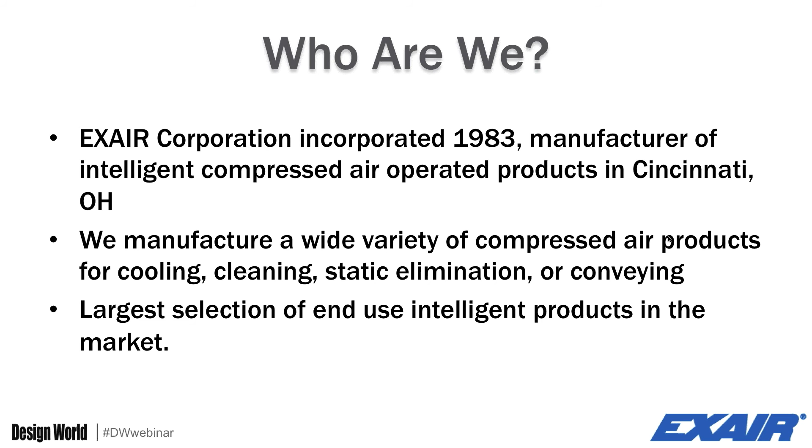I ask a little bit for you to get involved here. With the webinar format, it's hard to gauge reactions and interest. The first thing I want to do is see who's out there and test the speed of the chat. If you get a chance during the webinar, please send us your job title or responsibility that brings you here. Also, if you know the compressed air usage in your plant or the size of your air compressor, either in horsepower or SCFM, just to give us some idea of what you might be interested in and how we can help you. Let us know how the webinar works out for you. I'll give you a few seconds to get that inputted there.

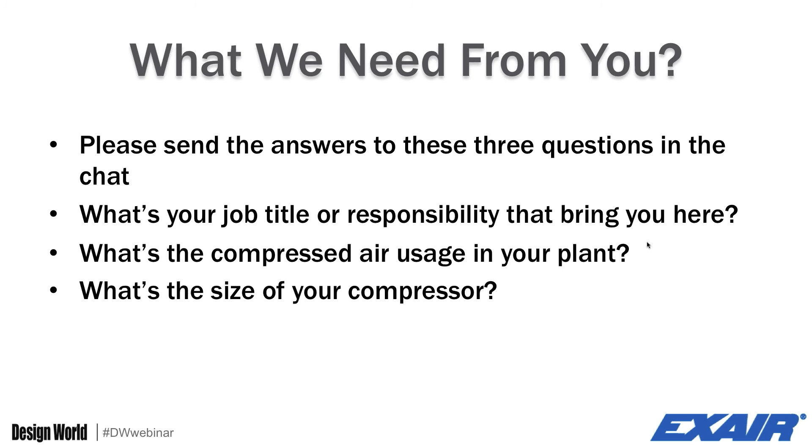Today we're going to talk about intelligent compressed air. Many compressed air systems are put in very quickly and inexpensively or cheaply. We want to take the next steps in replacing those open blow-offs and homemade nozzles or homemade blow-off devices with an engineered nozzle or an intelligent solution.

Later we'll get into the how, where, and what intelligent compressed air products are. First I want to talk about the why. It's very simply stated: money and safety. Compressed air is the most expensive utility in most plants. Inefficient blow-offs can cost thousands of dollars per year in wasted energy. Most estimates say that between 30 and 50% of all compressed air generated is wasted, and we want to help you find the largest sources of wasted compressed air. On the safety front, noise and dead-end pressure will be the two topics we cover.

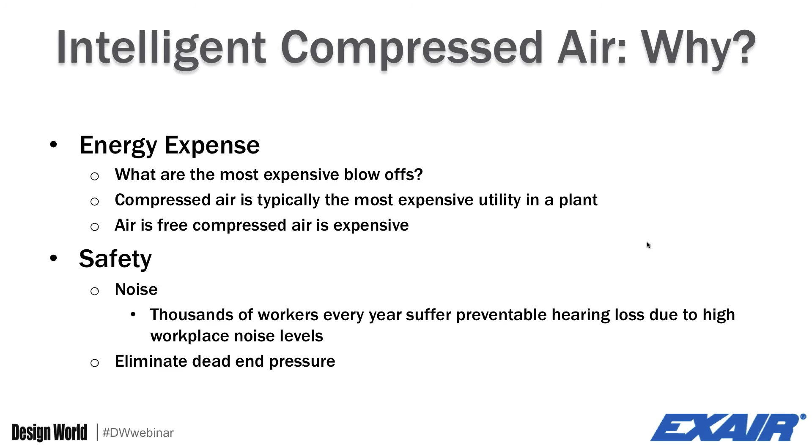This compressed air presentation is different from most. Instead of talking to you about your system's overall capacity and supply and demand, we're going to focus on the point of use. In many cases, folks preach to audit your compressed air supply to match your demand. They only want to ensure that the compressed air you use is generated as efficiently as possible. In this presentation, we focus on trimming your demand in the first place so that you aren't just improving your efficiency, but you're reducing your overall usage.

Once your usage is reduced, a compressed air audit can be even more effective to ensure that the air you need is efficiently produced. In other words, why would you want to install two high-efficiency 25 horsepower screw compressors when your plant only needs 20 horsepower worth of air? Finally, on top of the priceless value of safety, there are very real fines associated with OSHA violations from open blow-offs. I've seen fines from $6,000 to $10,000 for a compressed air violation.

So what we'll cover today is reducing demand, replacing inefficient processes, and increasing safety.

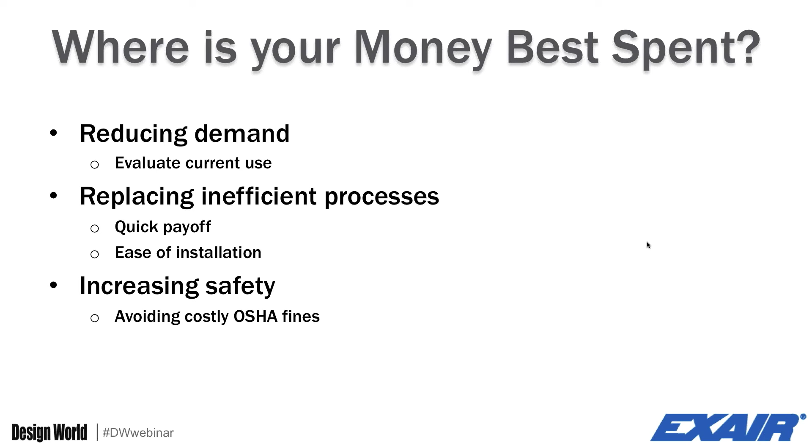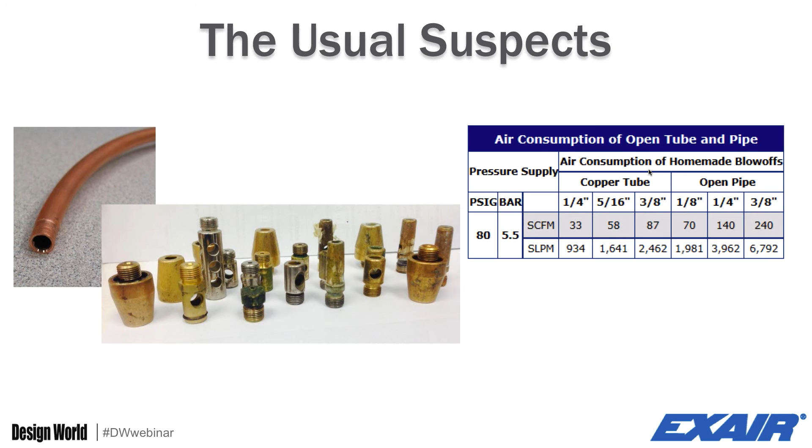An open-type tube also consumes more compressed air compared to an engineered solution, so it's wasting a lot of energy. On the right, here's a chart of the air consumption of an open tube or pipe. You'll see this quarter-inch copper tube pictured here throughout our presentation. In this chart, at 80 psi, it uses 33 SCFM of compressed air. That's quite a bit and is a significant demand.

That would be something you really want to look at for replacing with an air knife, or a long linear air nozzle, if you're not familiar, but it replaces a long span there.

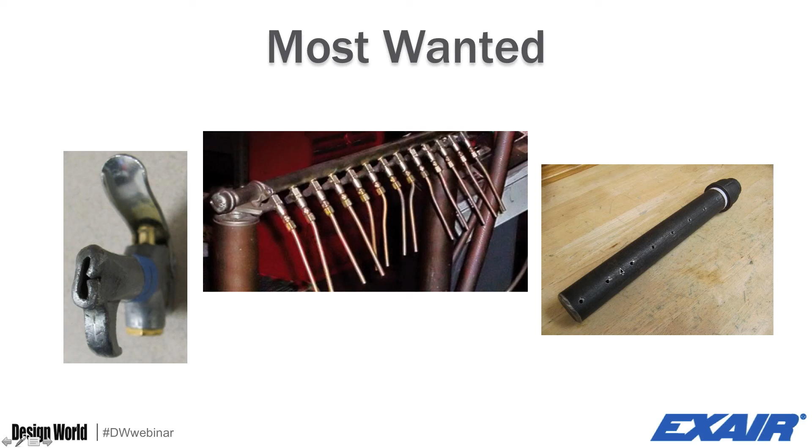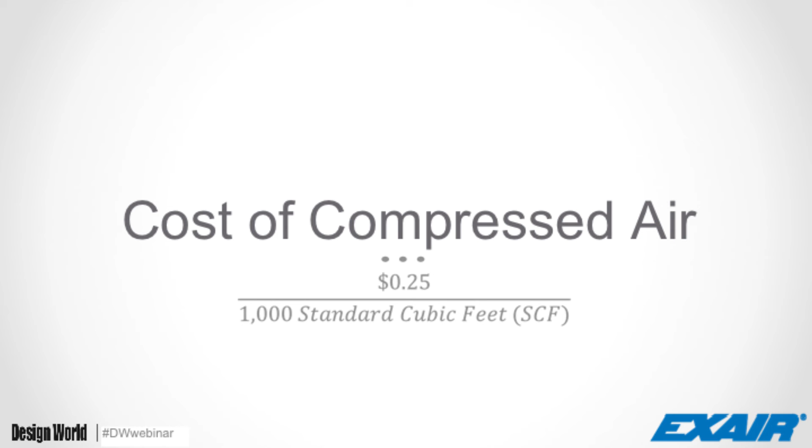I'm going to go through an example here shortly. First, a little bit of background as far as how we come up with the cost of compressed air. We use this in our literature: 25 cents per 1,000 standard cubic feet generated. This is a pretty conservative number for Europe and the coasts, but in the Midwest, it's a pretty accurate number by our account. And here's how we come up with that number.

Let's take, for instance, a 20 horsepower compressor that uses 15 kilowatt hours. Those 15 kilowatt hours at 8 cents per kilowatt hour means it takes $1.20 per hour to run that compressor.

You might have a different electrical rate that you want to replace in there, so please do that and follow along as best you can. If you have any trouble, you can always contact us with your electricity rate and the compressor itself, and we can look into that more.

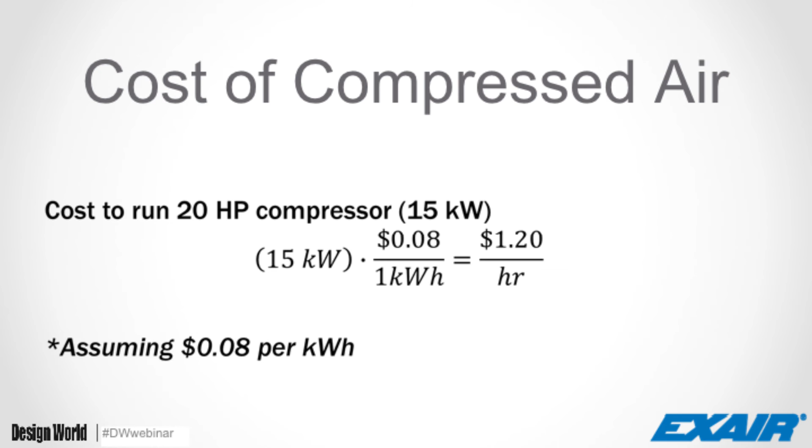So once we have the cost to run a compressor for an hour, let's look at the time it takes us to produce 1,000 standard cubic feet. A 20 horsepower compressor puts out approximately 4 SCFM per horsepower. Over 60 minutes, that'll put out 4,800 standard cubic feet per hour. To produce 1,000 standard cubic feet will take 0.2083 hours, or 12.5 minutes.

That 4 SCFM per horsepower is a conservative rule of thumb. Some air compressors can make 5 or more SCFM per horsepower, but individual compressors and delivery rates will vary. You never know how much you're leaking throughout the system, so we feel like that 4 SCFM is still a very good rule of thumb. You'll see that a lot in different compressed air presentations and forums. So we take that time it takes to produce 1,000 standard cubic feet, combine it with the cost it takes to run a compressor for an hour, and you get 25 cents per 1,000 standard cubic feet produced.

That's how we come up with that number. If you have any questions, please contact us. If you think that's a good number, then the rest of this will hold true, and you don't need to follow along quite so closely. If you come up with a different number, you can go through and use that as we're going through, or after the presentation, we can go back through it with you and figure out what your cost would be.

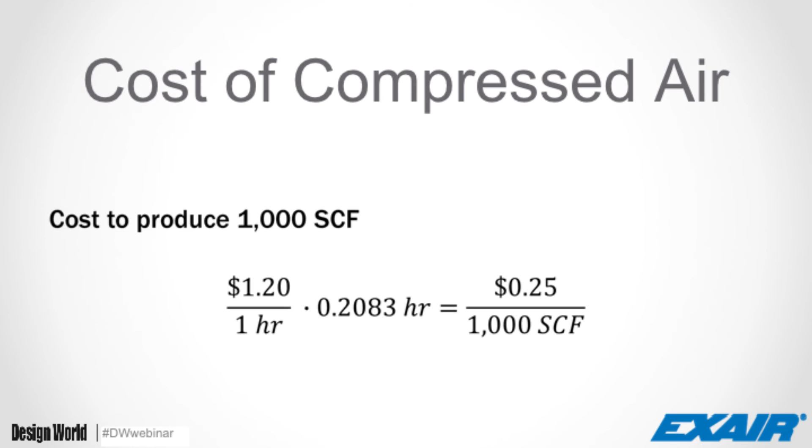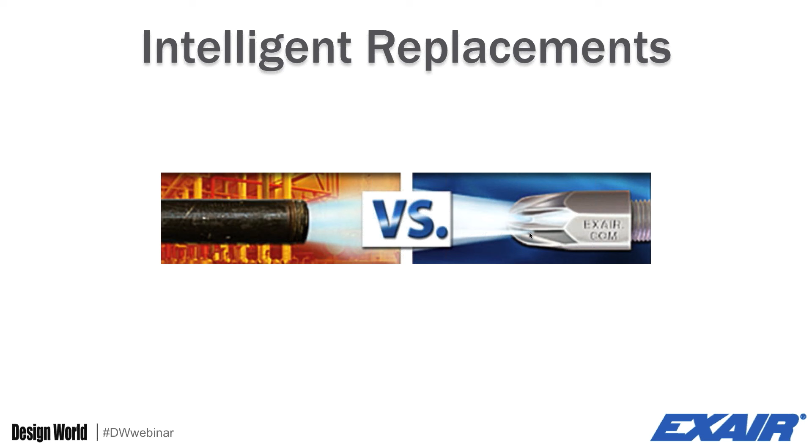Let's get to an example. How much would it really cost to run a 1/4-inch copper tube for a year, and how much energy could you save with a compressed air nozzle? There are a number of slides here of calculations. Please ask if you have any questions.

So a 1/4-inch copper tube, as we said earlier, is going to use 33 SCFM of compressed air compared to a 1100 super air nozzle, which has a 1/4-inch NPT air inlet. It uses 14 SCFM. In addition to the air consumption, you also notice the noise level is almost 30 decibels higher with an open tube as opposed to an engineered solution.

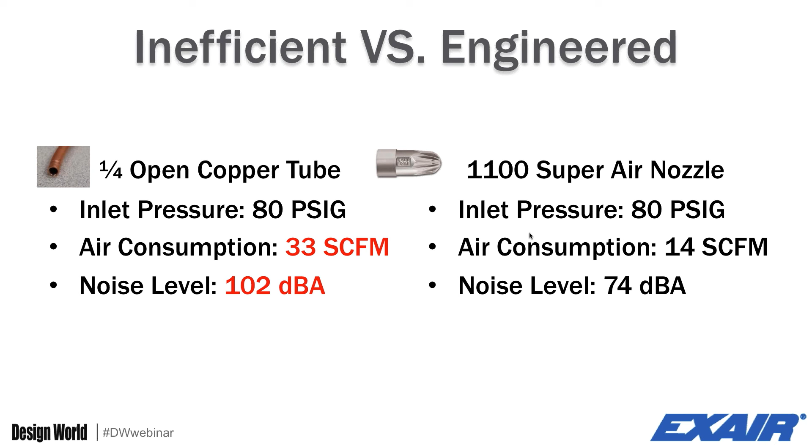A 1/4-inch open copper tube costs 50 cents per hour to run. We did that by multiplying 33 standard cubic feet times 25 cents per 1,000 standard cubic feet, which was that cost of compressed air that we received, and then multiplied it by 60. So that was able to get us that 50 cents per hour to run here. The shift would cost $3.96.

An 1100 super air nozzle would cost 21 cents per hour to run, so you saved around 28 cents per hour to run it. Per shift, an 1100 super air nozzle will cost $1.68. An 1100 super air nozzle saves $2.28 every 8-hour shift over a 1/4-inch copper tube.

But we take that number of 1/4-inch open copper tube costing $3.96 per shift over 250 shifts per year, and that will cost $990 per year. A 1100 super air nozzle costs $1.68 per shift times 250 shifts per year, which costs us $420 per year to operate. So an 1100 super air nozzle saves $570 every year over a 1/4-inch copper tube.

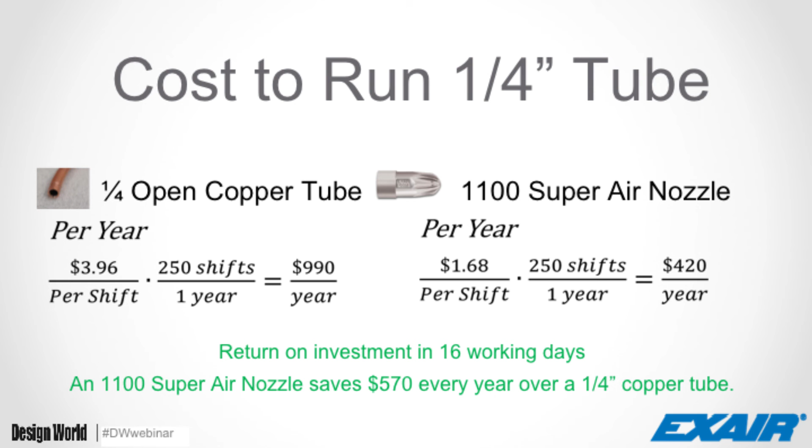So we didn't talk about any benefits from compressor maintenance, noise reduction, or OSHA compliance. All we talked about is the cost of compressed air. You can see there's a significant savings just replacing one nozzle. In a couple of minutes here, we'll talk about a case study where a customer replaced 40 of these open tubes and the savings they were able to realize. If you have any questions about how we got there, I'm sure you do. Please let me know at the end, and we'll go through that again.

Let's look at a case study. This is a customer that we had that was a high-tech plastic producer. They're operating 40 machines that use crimped quarter-inch copper tubes at 100 psi. You can see each of these copper tubes here that have been smashed.

You'll notice there's slight variations. This one's a little more rounded. That one definitely has a crease in the center. This one shows a little sign of the crease, but is overall an oval pattern. These had varying rates of how much compressed air they actually used, but overall it was still much higher, so we took an average of those to compare it to our 1100 super air nozzle.

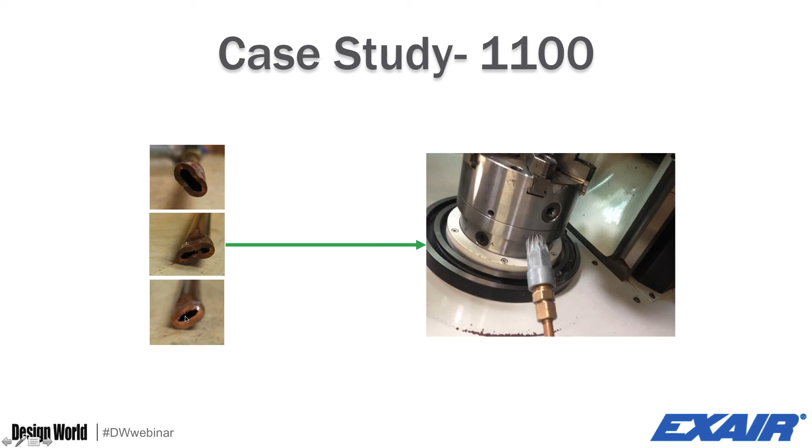We actually tested those quarter-inch crimp pipes at our facility. They consumed 40.4 SCFM at 100 psi. You'll notice that 40.4 is larger than the 33 SCFM I was using in the previous example. That's because they're running at a higher inlet pressure, so they use proportionally more compressed air. The 1100 super air nozzle at 100 psi will save or use 23.4 SCFM less than that 40.4 SCFM.

Quarter-inch copper pipe costs $1,260.48 per year to operate. An 1100 super air nozzle is going to save $730 per nozzle per year to replace. In this example, an operational year is an 8-hour day with 250 days per year or 250 shifts per year.

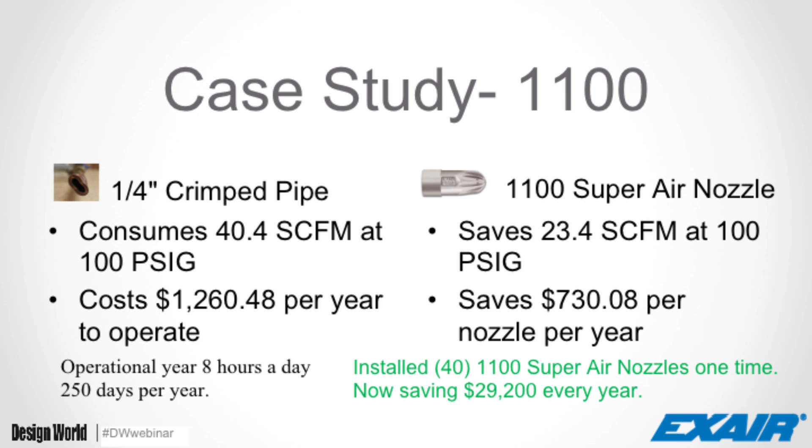The company that we were working with in this case study replaced 40 quarter-inch crimped pipes with 1100 super air nozzles, resulting in the savings of $29,200 just in compressed air usage every year, and they were able to realize that indefinitely. Really, there's no reason that will ever change. They're always going to be able to save that amount of money on their utility bills.

So you can see, it might not cost a lot to run a compressed air nozzle for a couple of minutes or an hour, but if you're running continuously, that can add up to a very big cost over the years, and replacing those can be a huge savings.

Talking about on the compressed air side, not so much just money, but how much compressed air you actually saved. An 1100 super air nozzle saves 23.2 SCFM over that quarter-inch crimped pipe.

An air compressor produces 4 SCFM per horsepower. So to replace that crimped pipe with a nozzle, you reduce your compressor load by 5.8 horsepower per nozzle. Replacing 40 nozzles could save 232 horsepower of compressor. When you talk about air audits and efficiency of the compressors and the load, being able to cut that demand can really have an impact.

Air audits still have their place and can make a tremendous difference, but you want to make sure that you're sizing that demand properly. Being able to cut that demand is a great first step.

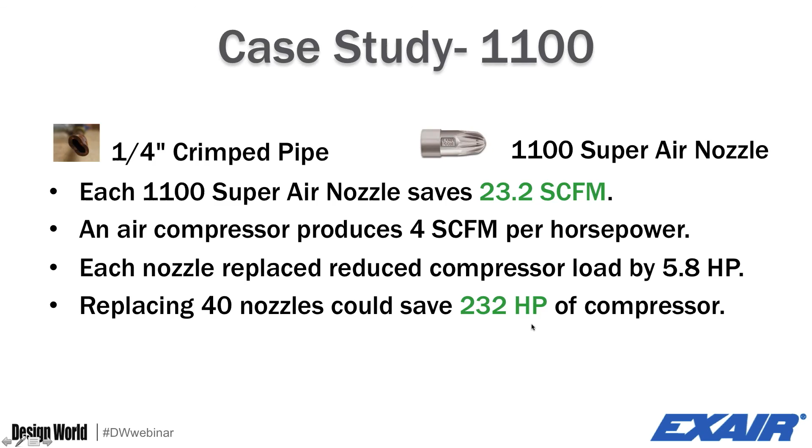So that's what I wanted to cover about the cost of compressed air. We'll go back to that as well here in a minute, but I want to talk a little bit about the safety benefits as well. Specifically, we're going to talk about OSHA Dead End pressure regulations and the noise directive.

You can either limit your pressure incoming to the nozzle to 30 psi, or you can allow some kind of regulation to control the pressure to 30 psi. For our nozzles, we prevent them from being dead-ended so that pressure cannot build up. There's always a path for the air to escape. Let me show you an example of what I mean so maybe you can get a better understanding.

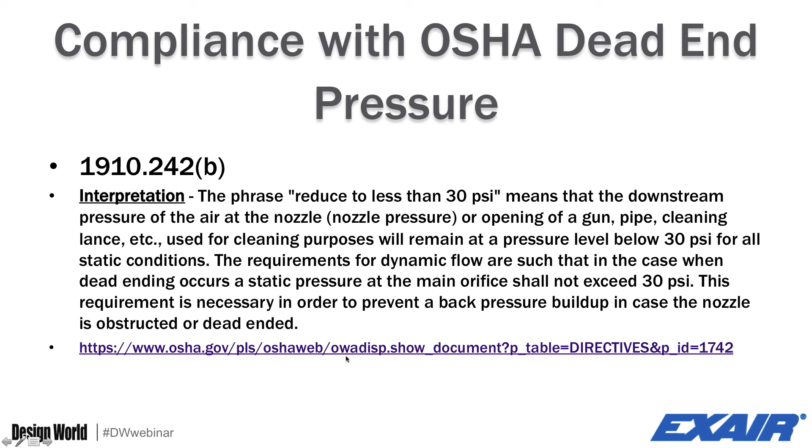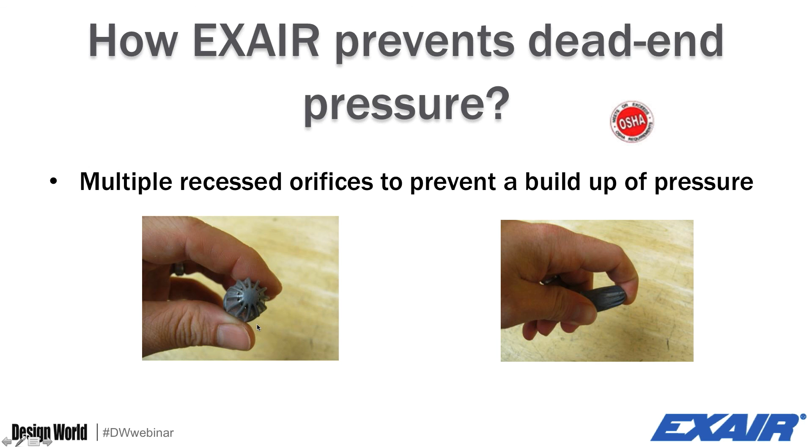Allowing you to comply with that OSHA regulation. All of EXAIR's products use some combination of these principles, either multiple orifices or a covered orifice, to bring you an OSHA-compliant compressed air device.

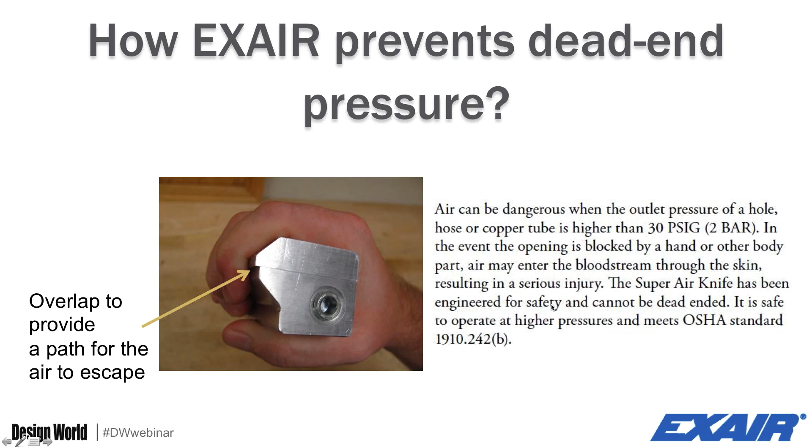Other than the OSHA dead-end pressure, there's also the noise directive. OSHA has outlined a maximum allowable noise exposure table to protect workers from constant noise. If you're exposed to more than 90 decibels of noise in an 8-hour period, you're required to wear some sort of hearing protection or take some steps to mitigate that noise to protect your workers.

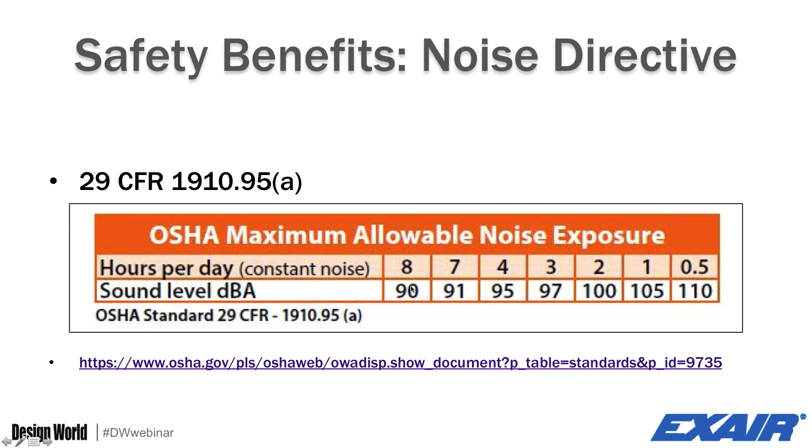By using an engineered air nozzle, you will reduce the noise with the smooth flow that the nozzle creates. The intelligent compressed air product does not feature that piercing wind shear noise, which is especially painful and distracting. You'll notice this with cross-drilled holes all the time. There's a real high-pitched noise that I associate, or used to associate, with compressed air before I worked here, and you can see a huge change in the flow, just the way we condition the air coming over the nozzle, as opposed to the sharp corners that you typically see.

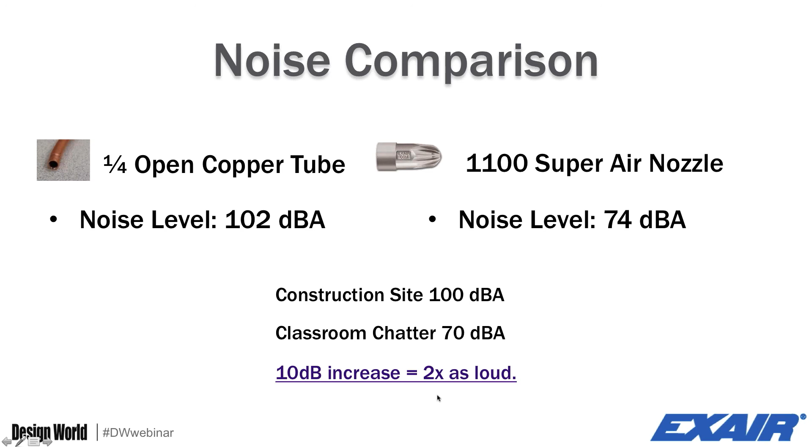Just to give you some reference, a construction site is around 100 decibels. That's up near where that copper tube may be. Classroom chatter with a room full of 5th graders is probably around 70 decibels. Something you can definitely talk over; you might have to raise your voice a little bit, but it's something you can carry on your workday through. Just to give you a point of reference, a 10 decibel increase means that you're going to perceive the noise as twice as loud. So that 30 decibel increase means that a 1/4-inch copper tube is perceived 8 times as loud as an 1100 super air nozzle.

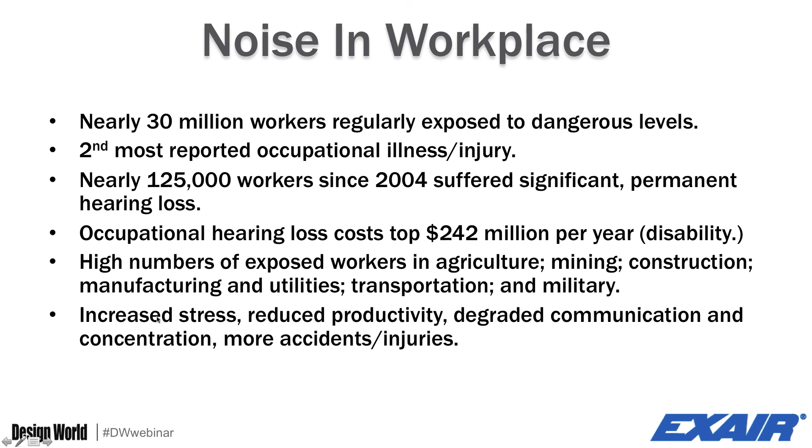Anytime you're trying to train new employees or communicate with a group of people, that noise is going to intrude. And anything you can do to cut down on that, to allow people to clearly communicate, is going to be better for the overall safety of your facility, and that can't be overstated.

So I talked a lot about an EXAIR nozzle, an intelligent compressed air product, or an engineered nozzle. What makes a product intelligent? There's a couple of things that I would want to see in an engineered nozzle. Some sort of air entrainment, a nozzle designed to pull in ambient air to get the most use out of your compressed air. In the next slide, we'll talk more about what that is and how EXAIR does that. Second, we want the nozzle to be quiet, and lastly, we want the nozzle to be safe. An engineered nozzle has taken these three components and made it intrinsic to the design so that you can get the most out of your compressed air.

Secondly, you're looking for some sort of manufacturing quality and consistency. Quarter-inch crimped copper pipe is going to be different, and it's going to vary from person to person who crimps it and makes it and how it's applied. Using an engineered nozzle is going to give you that precision and that consistency so that you know it's going to work in every spot, not just where the person has set up that copper pipe just perfectly. Those are the big reasons you want to take a look at upgrading your blow-offs when you can.

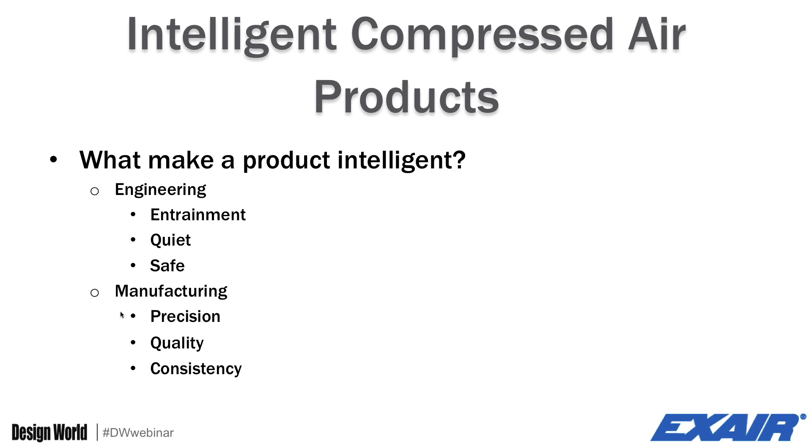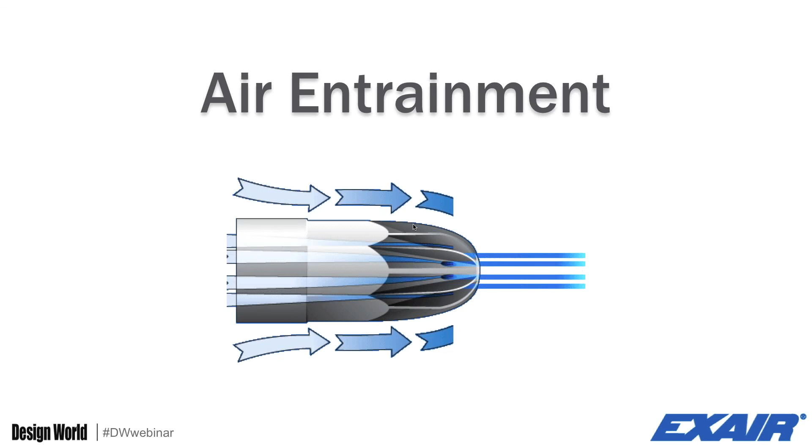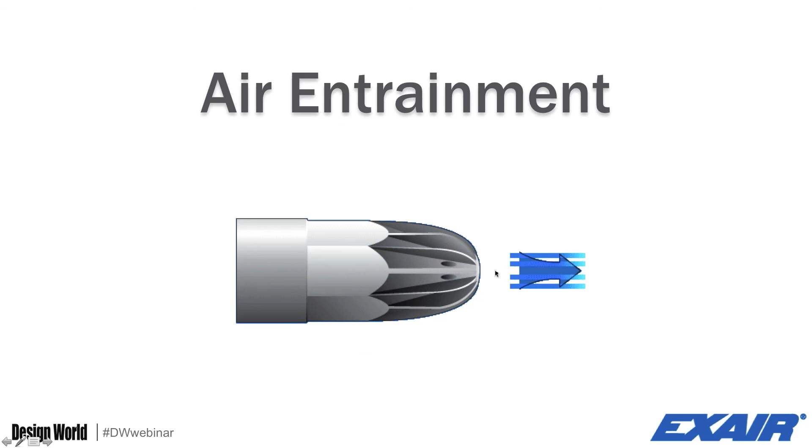A little graphic here for air entrainment. Here we have an 1100 super air nozzle. You can see the primary airflow coming out of these openings here. This fast-moving jet of air creates a low pressure around the nozzle, which induces the flow of free or ambient air from the environment. So any free air surrounding that nozzle is going to be sucked into the airstream and pulled in. This induced airflow is 25 times the amount of compressed air used by the nozzle. So even if you're only putting in one part of compressed air, or one SCFM, you're seeing 25 or 26 SCFM flow from the total airflow. This means for a smaller amount of compressed air, we can create a larger force than compressed air alone, giving you the most effective use.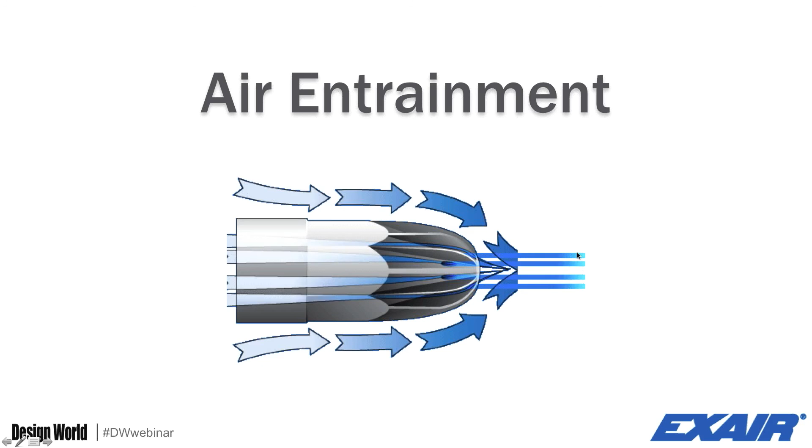I want to rehash a couple of things there. So what are the benefits of intelligent compressed air products? Saving money in operating costs. We talked about the cost of compressed air and how we can calculate that. We eliminate dead-end pressure so that we don't have to worry about an OSHA violation. We decrease the noise level, which leads us to a safer, more productive environment.

Finally, one new thing: utility rebates. There's a website, DSIRE, that you can see. It's broken up by utility. So you can go on that website, call up what your utility supplier is, and look to see what rebates they have.

Utility companies, similar to what they did with compact fluorescent light bulbs, will actually pay people, or at least cover the cost, to install nozzles on their compressed air system because it's such a significant user of their electricity. Just cutting that usage is worth it for them so they don't have to upgrade their power plants.

Please take a look at that website when you get a chance. It's specific to each utility, so I can't give you any examples because it all depends on where you're at, but it's definitely worth your time to take a look.

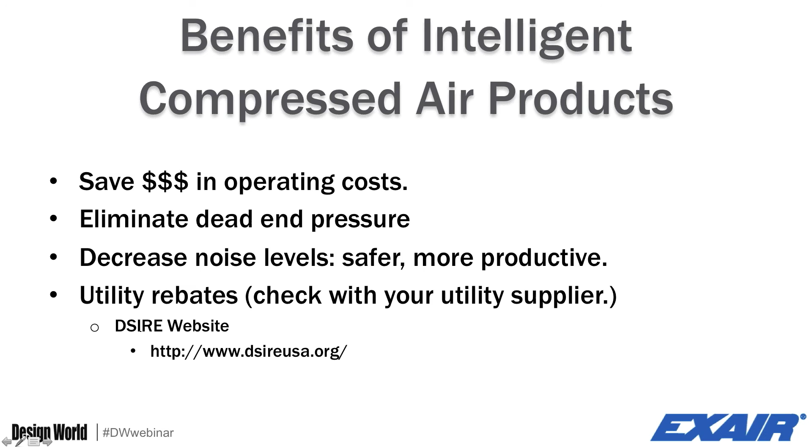So, next steps. I took a look at my plant and covered all the compressed air blow-offs that I have. I have some kind of nozzle on them, some kind of air knife, some device to limit that compressed air flow. What else can I do?

One thing you might want to do is flow measurements. If you know what nozzle you installed, you should be able to add up all those air nozzles and their flow, and compare that to the flow measurements you're taking from your compressor or on a branch. That'll let you know if you're maybe missing a blow-off or two, or if there's just a tremendous amount of leaks causing your flow to be higher than expected.

Second, you want to look at flow management. EXAIR has a product called an electronic flow controller that will allow you to turn your compressed air on and off. It's got a photoelectric eye so it senses the product and turns the compressed air off when that product is not in front of the nozzle, and turns it back on when the nozzle can be useful.

Simply turning off compressed air when it's not in use can also be effective. If you have a branch full of piping that always has compressed air to it, but no one uses it for several days or several hours, it might be worthwhile to see if you really need to leave that compressed air on all the time, because you will have leaks.

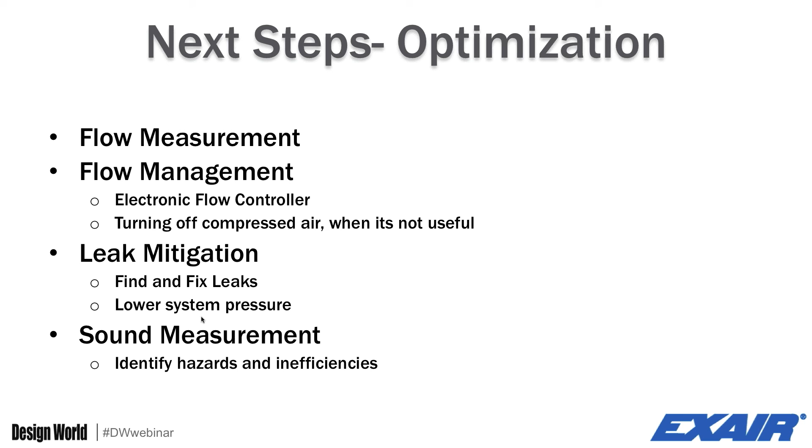Also wanted to take a minute and talk about EXAIR's Efficiency Lab. EXAIR will take your current installation, whatever it is — a homemade blow-off, an open pipe, a modified gun, a liquid nozzle — and test it in our lab against our intelligent compressed air products. This will give us force, flow, and noise data, and allow you to get a better sense of what you might want to do and how much compressed air you can save. The results are confidential, and we will provide a report.